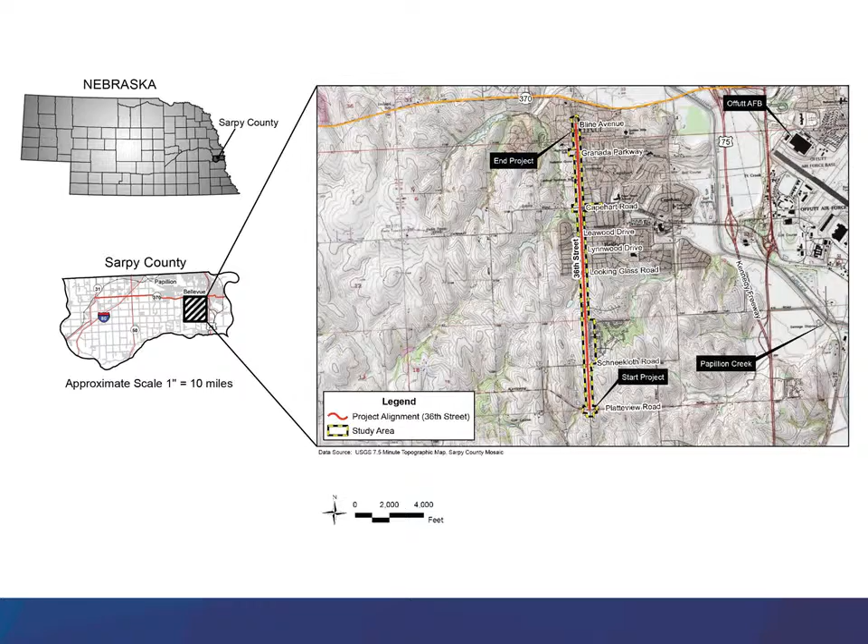The existing roadway is a 2-lane rural roadway with no surface shoulders and ditches. This project is intended to develop an improved transportation corridor between Bline Avenue and Platteview Road in Bellevue. The improved corridor is intended for the following purposes. 1. Improve local traffic operations along 36th Street and accommodate future traffic volumes and travel demands between Bline Avenue and Platteview Road. 2. Facilitate the safe and efficient flow of existing traffic.

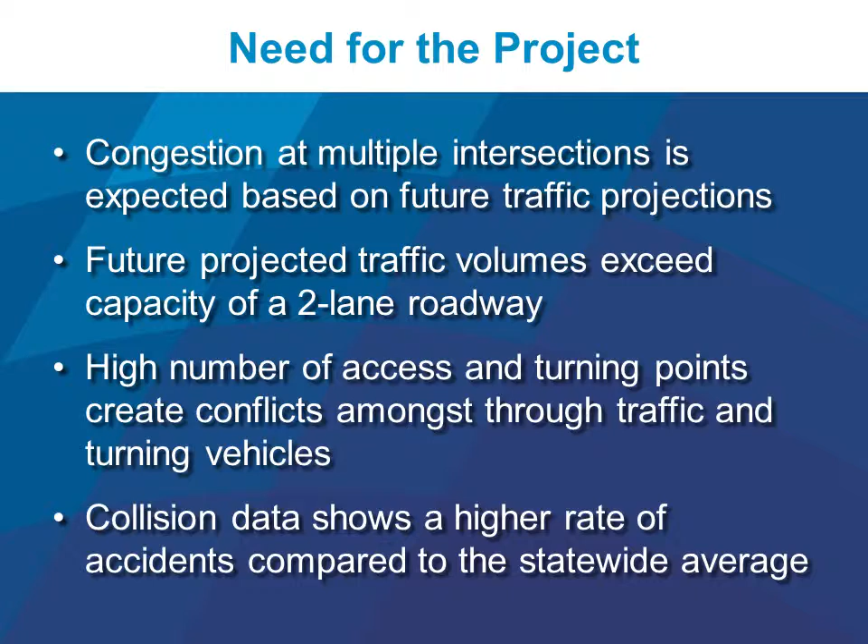The need for the project is to reduce the current and future problems with congestion and travel delays along the 36th Street corridor between Bline Avenue and Platteview Road while increasing mobility, improving system levels of service, and enhancing safety. The forecasted traffic volume for 36th Street for the year 2040 is 26,000 vehicles per day north of Capehart Road and 12,000 vehicles per day south of Capehart Road.

In addition to a no-build alternative, 7 alternatives were studied along the project corridor. These include spot improvements and various lane configuration alternatives. Alternatives 2, 3, 4, and 7 were not carried forward as they did not meet the purpose and need. Alternatives 6 and 8 were not selected as they had greater impacts and less public support than Alternative 5. The no-build alternative was carried through the EA analysis as required by NEPA. The no-build alternative provides the baseline for evaluating potential impacts.

The 4-lane divided 3-lane combination alternative was determined to be the preferred alternative. This alternative meets the project purpose and need, resulted in fewer environmental and right-of-way impacts, and had the greatest level of public support during the previous public meetings.

To comply with the requirements of the National Environmental Policy Act, an environmental assessment has been developed for this project. The purpose of the environmental assessment is to evaluate potential impacts to the environment that may result from the proposed project alternatives. The environmental assessment could result in one of 3 outcomes: a finding of no significant impact, a determination that more information is needed, or that significant impacts would occur and an environmental impact statement is required.

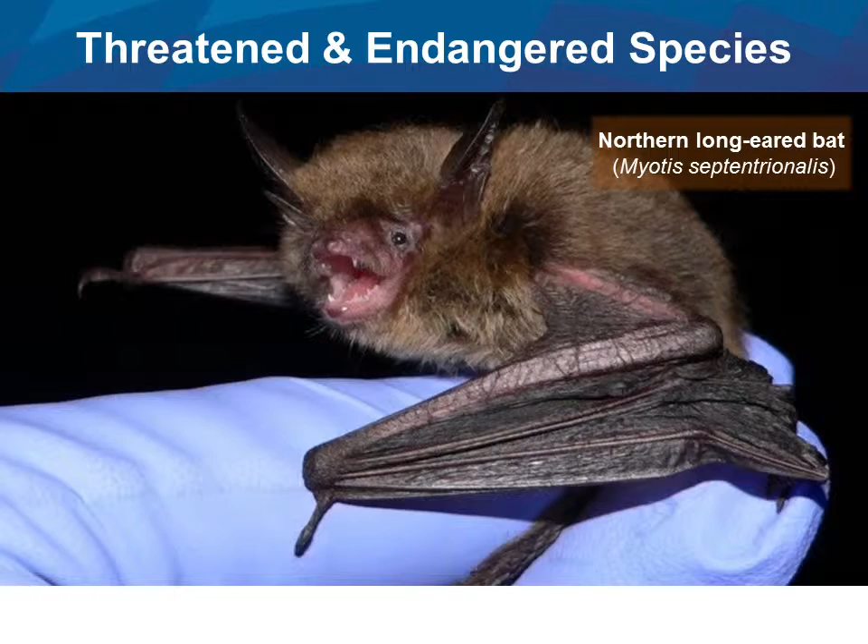It has been determined that one property within the study area is eligible for inclusion on the National Register of Historic Places. This property would be avoided, and the project would result in a no adverse effect determination. The State Historic Preservation Office concurred with this determination. Publicly owned parks, as well as wildlife refuges and properties eligible for the National Register of Historic Places, are protected under Section 4(f) of the Transportation Act of 1966.

No impacts to the features, attributes, or activities of Leawood Oaks Park that make it eligible for protection under Section 4(f) would occur. The park impacts would be minimized by constructing a retaining wall in the area. As a result, FHWA has determined this project results in a de minimis impact. The City of Bellevue Parks Department has concurred with this determination.

The project was evaluated to determine if it would result in increased noise impacts to residents along the corridor. The noise study determined 9 receptor locations would be impacted by the project. Noise walls were evaluated to mitigate these impacts, and all but one were determined to not be feasible and/or reasonable. A noise wall is feasible if it can be built to meet noise reduction goals, fit in the topography, and does not pose a safety concern. A wall is reasonable if it's cost-effective and is accepted by the adjacent landowners.

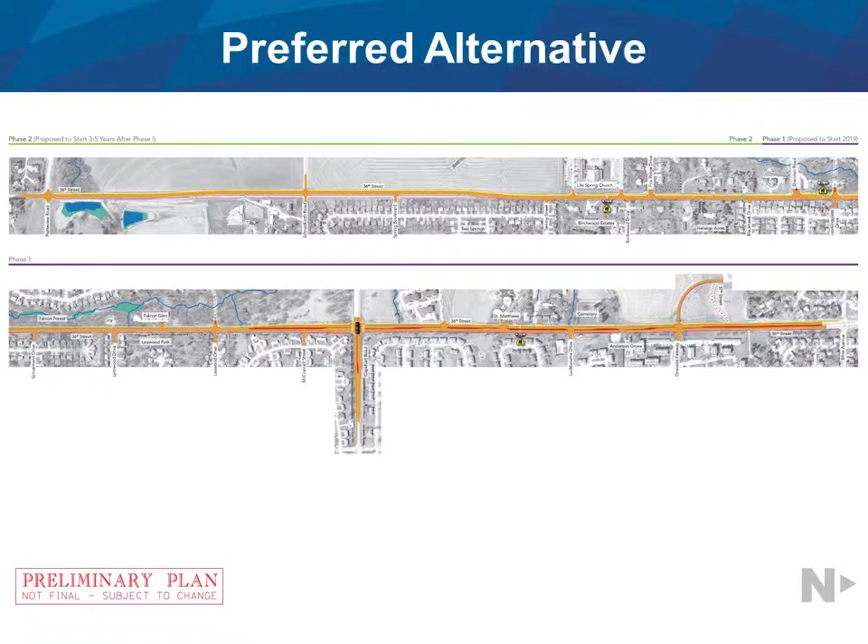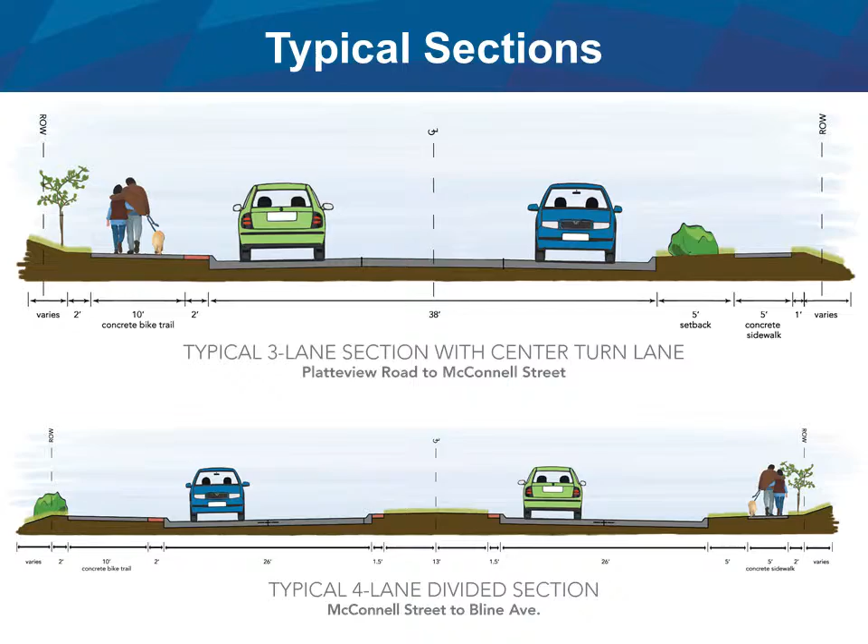The proposed improvements consist of reconstructing the existing 2-lane roadway to a 4-lane divided section from Bline Avenue to approximately McConnell Street. It then transitions to a 3-lane roadway with center turn lane south to Platteview Road. Curb and gutter, sidewalks, and a bike trail will be included. Starting at Bline Avenue, the 4-lane section would be carried south. Direct access to driveways would be reconstructed as needed throughout the corridor.

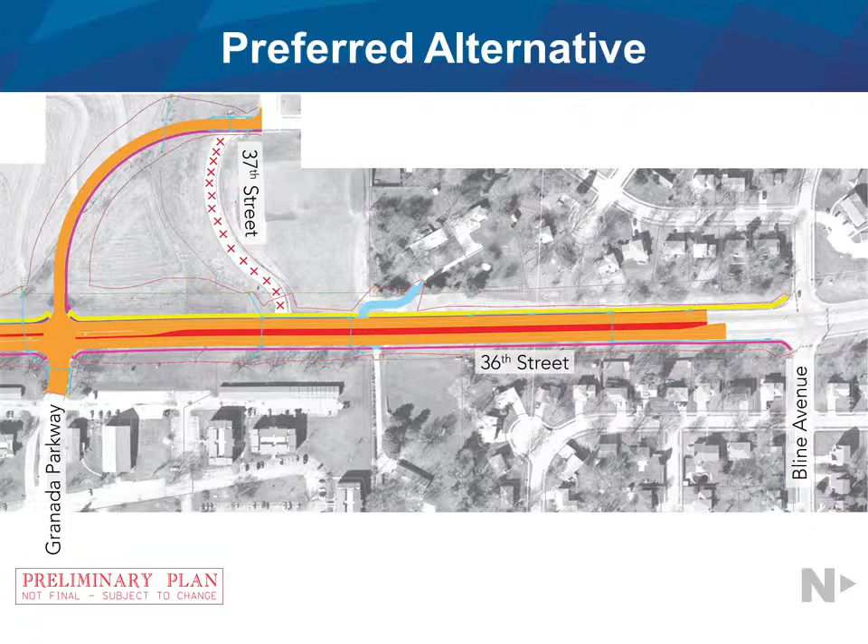37th Street would be realigned across from Granada Parkway. This would be done to reduce conflict points and improve safety. Grades on the new 37th Street would be improved as well. This improvement was not shown in the draft environmental assessment, but will be shown in the final document. Continuing south, access to the Anderson Grove Presbyterian Church would be maintained at all times. Impacts to the church parking would occur as a result of the widening.

Approximately 8 stalls are in the existing right-of-way and will be removed. Handicapped parking stalls would be maintained, and ADA access to the church would be maintained at all times. Potential solutions include reconfiguring the existing stalls on the south side of the building and maintaining ADA accessible entrances. The city would work with the church during the final design and right-of-way process to address these issues.

The median width would be reduced through this area, and retaining walls proposed to minimize impacts to the adjacent properties. The existing pedestrian crossing and access sidewalk would be reconstructed to meet current standards, and the driveway at St. Matthew's Church would be reconstructed to improve access and operations during school pickup and drop-off.

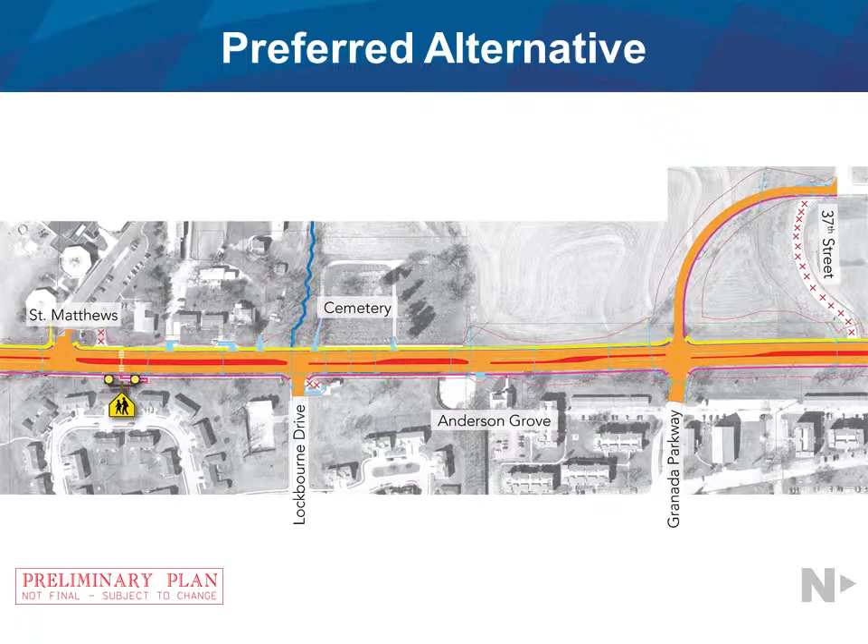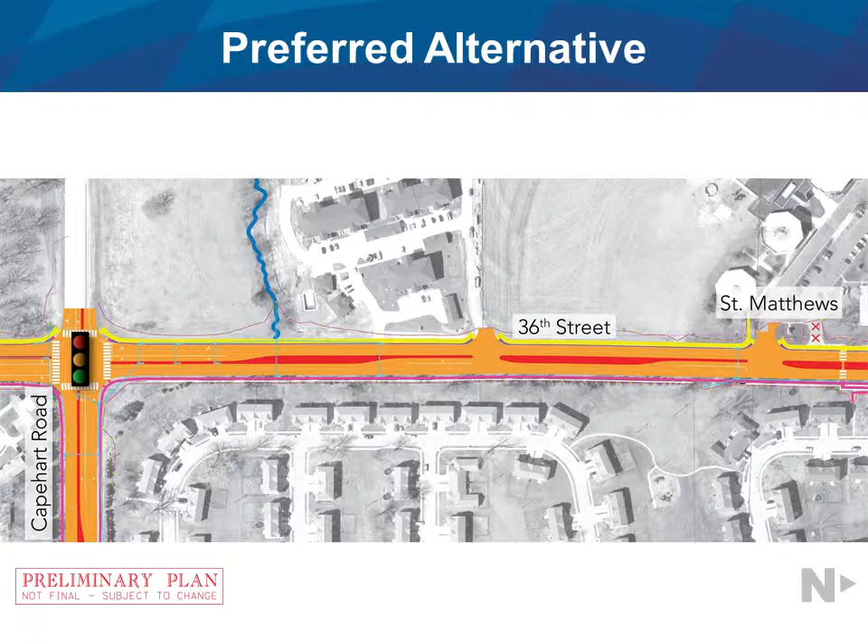Moving south, we approach Capehart Road, where the traffic signal would be reconstructed along with the intersection improvements including dedicated turn lanes. Retaining walls would again be necessary to limit impacts to the Department of Defense properties to the east. Along Capehart Road, the west side would have minimal improvements, while the east side would widen out to the 4-lane divided section to improve the intersection operations. This would require improvements extending to 33rd Street to taper back into the existing roadway. Consultation with the DoD has occurred regarding impacts to their property.

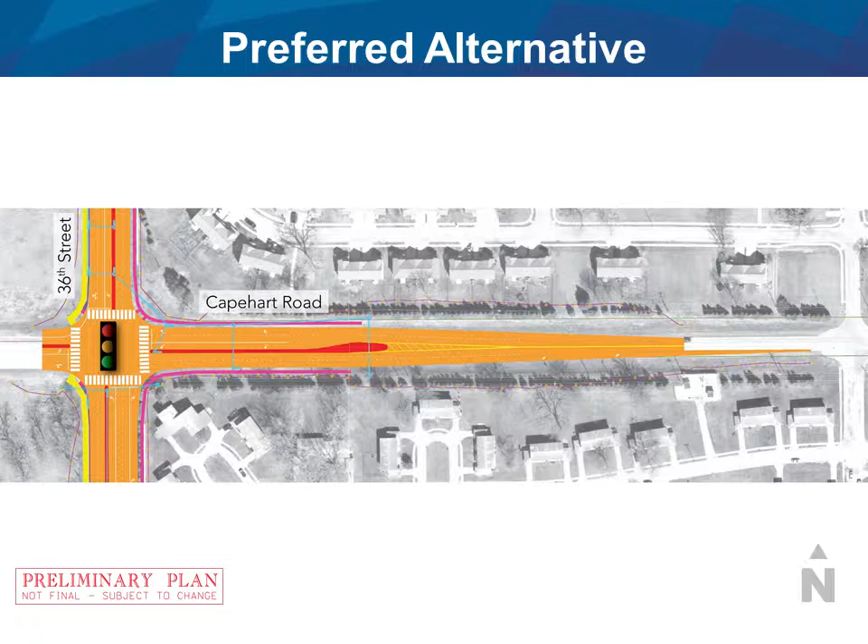The trees within the limits of construction along the corridor will be removed as part of the road construction. Jumping back to the 36th Street corridor, a noise wall may be constructed south of Capehart along the DoD property, pending a vote by the impacted owners.

Between McConnell Street and Leawood Drive, 36th Street would transition to a 3-lane section with a center turn lane. The roadway would be offset to the east to aid in construction and facilitate widening in the future. Access to utility facilities along the corridor, such as the CenturyLink building, would be maintained at all times. On the east side is Leawood Park. Retaining walls would be constructed to limit impacts to the park.

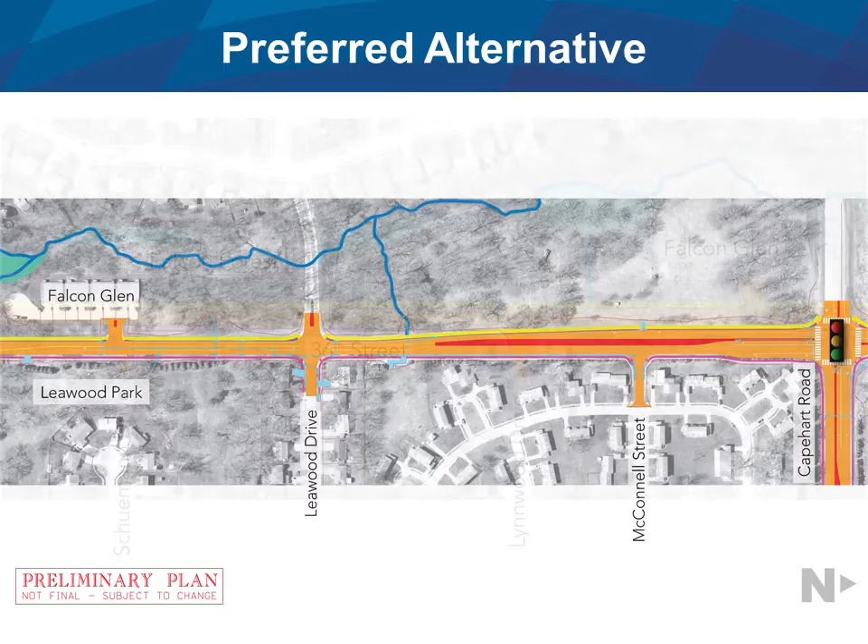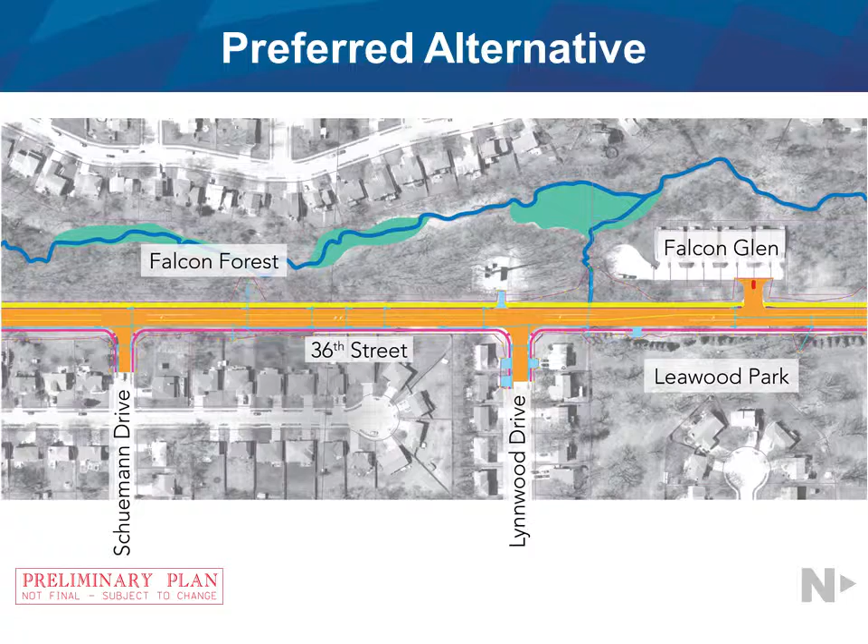Up to 200 feet of side streets would be reconstructed as needed to tie into the new grades on 36th Street. Private fences impacted by construction would be rebuilt during the construction project. Impacts to the tributary along the west side would be limited to the areas of storm sewer outfall construction. South of Lookingglass Drive is the Heartland Hills SID Park. No impacts are anticipated at this park.

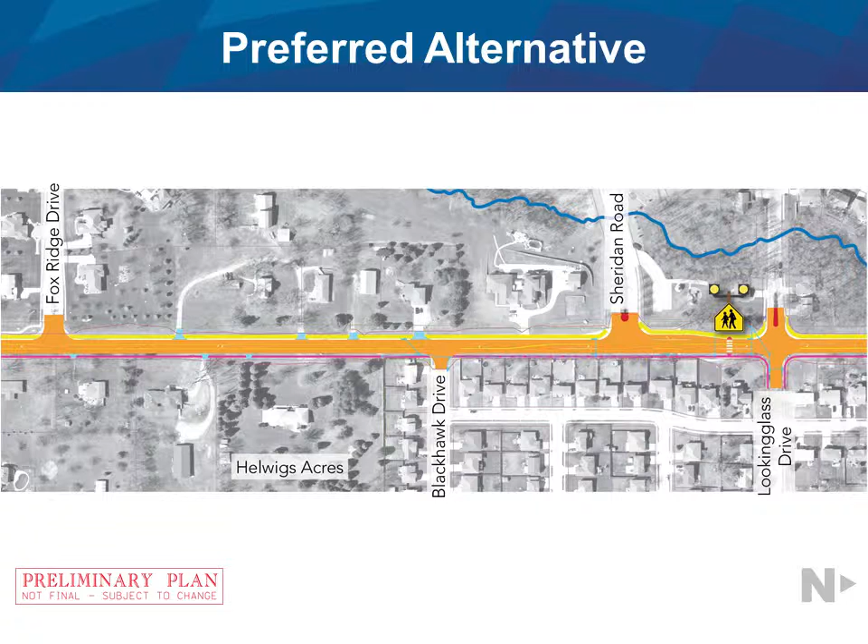The existing pedestrian crossing and right turn lane would be reconstructed to meet current standards. Impacts would be avoided to the historic farmstead. Continuing south, the existing pedestrian crossing would be reconstructed to meet current standards. South of Tammy Street, the alignment of 36th Street would shift to the west. This would reduce the impacts to the properties on the east side, as the elevation of the roadway must be raised to avoid impacting the 60-inch water main that lies underneath the roadway.

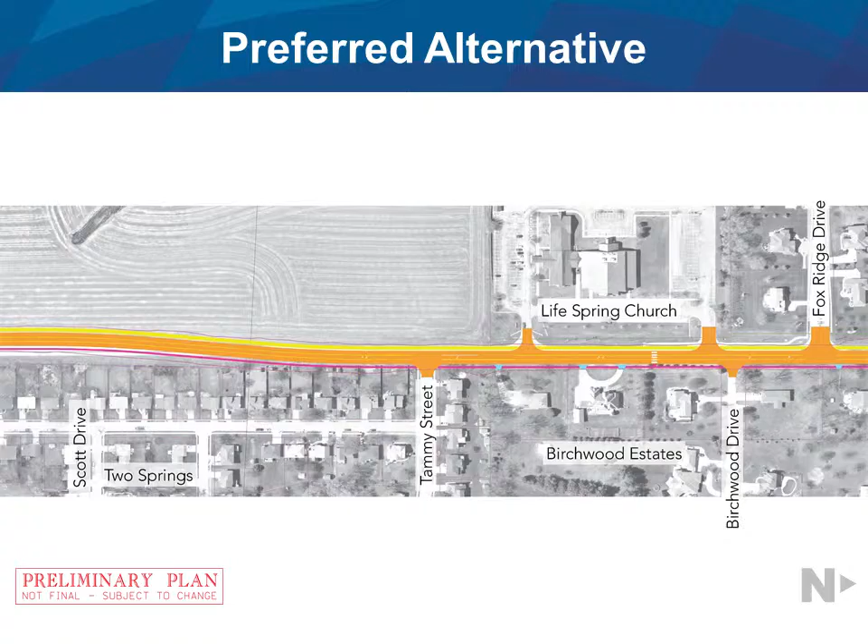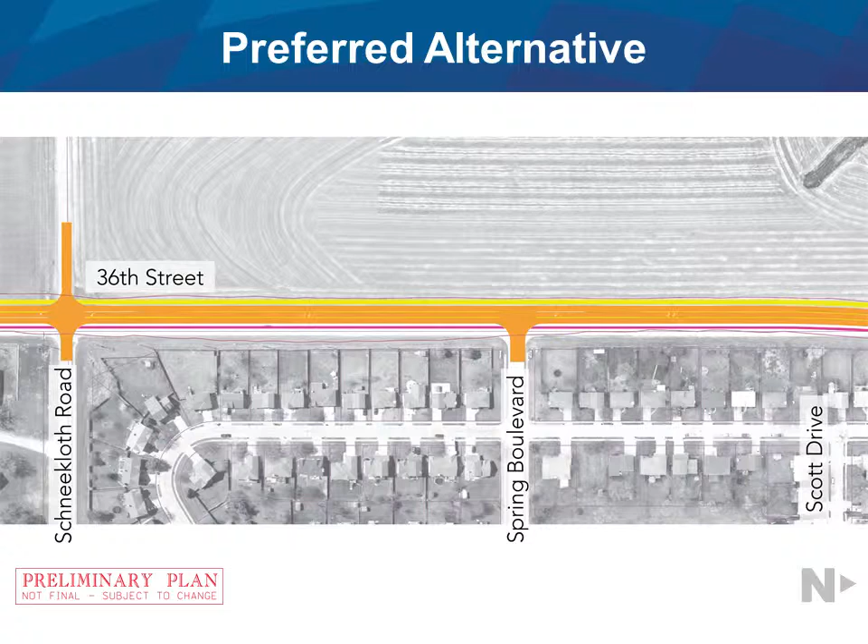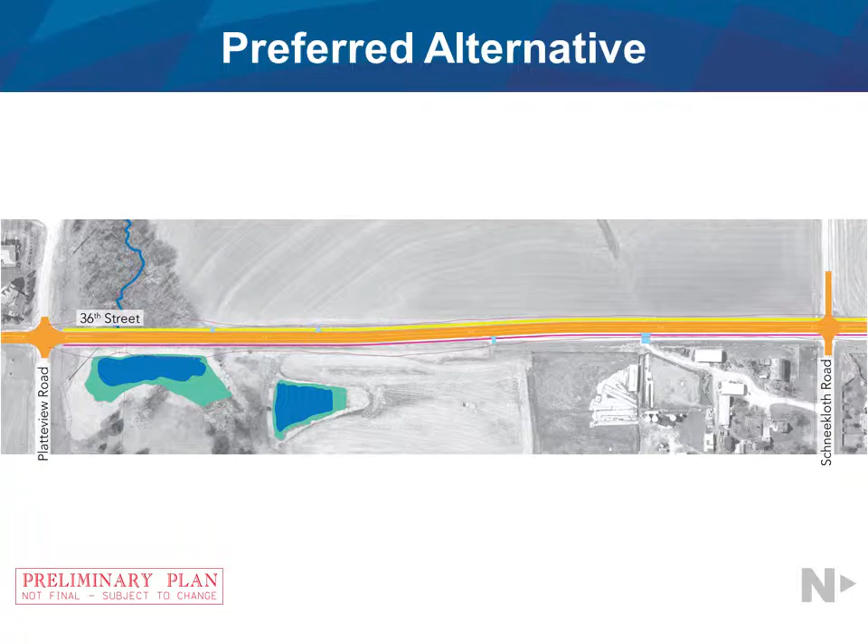36th Street would stay on this shifted alignment through Schneekloth Road. The open farmland on the west would allow for the shift to again minimize impacts to the properties on the east. Approximately halfway between Schneekloth Road and Platteview Road, the alignment would shift back to the existing section line and tie in at Platteview Road. Impacts to the adjacent wetlands and channel have been minimized. No improvements to Platteview Road are proposed as part of this project.

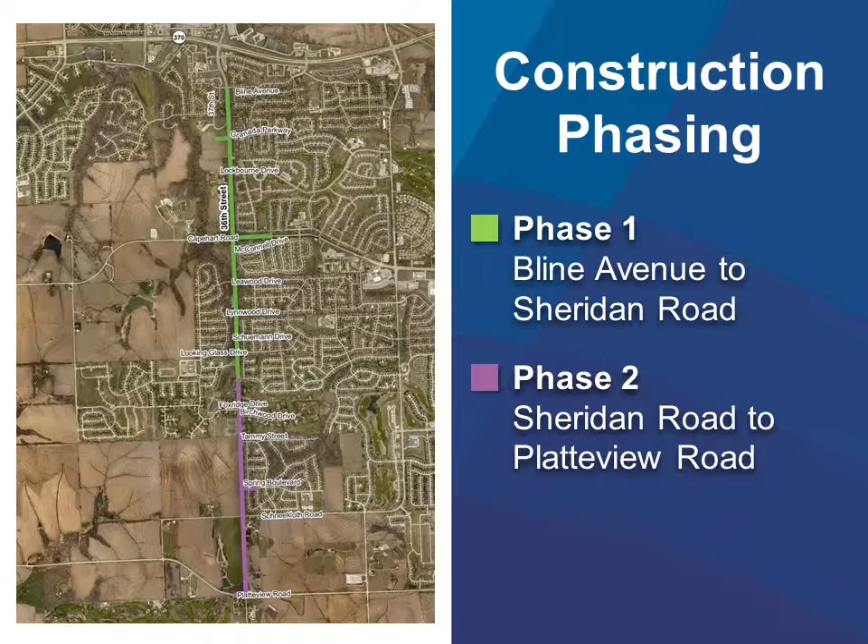Construction of 36th Street is broken into 2 projects. Phase 1, Bline to Sheridan, is proposed to begin in the spring of 2019, and Phase 2, Sheridan to Platteview, would start approximately 3 to 5 years after Phase 1 is complete, when funding is available. In general, the Phase 1 project would be constructed over 2 construction seasons, currently proposed to work from south to north, keeping traffic open during construction.

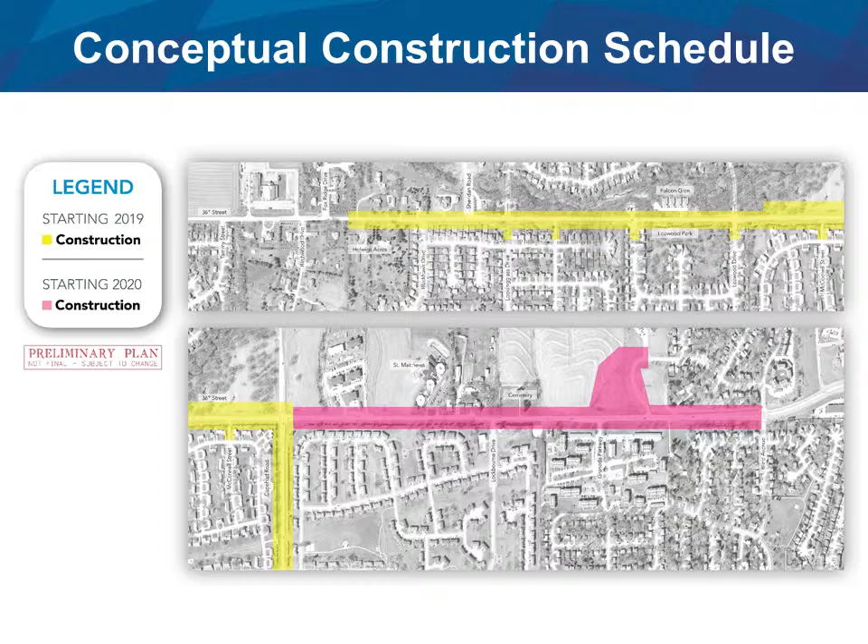This would be accomplished by using temporary pavement and closure of alternating intersections to allow neighborhood traffic to access 36th Street. Through traffic on 36th Street would be maintained using temporary road widening, and access to neighborhoods and properties would be maintained at all times during construction activities. Some residences on 36th Street could lose direct access during driveway reconstruction. This restriction would be short-term, up to 2 weeks. Alternative access or parking accommodations would be made in the same neighborhood up to 2 blocks away.

Coordination with properties losing access would occur prior to the work commencing, and special access needs would be addressed on a case-by-case basis. Access for emergency response would be coordinated through the project. Trash and recycling service would continue during construction. Residents would place their containers in their driveways on regular collection day. The contractor would be responsible for transporting the containers to a designated collection zone and returning them to the respective property.

The costs of construction for the 2 program projects are as follows. Phase 1 is approximately $10.9 million, and Phase 2 is approximately $9.9 million. Funding sources would include federal and local funding through the City of Bellevue. The City of Bellevue would participate with a 20% cost share.

All interested persons are invited to present remarks and questions. Your comments are encouraged. Public statements may be made between 6:30 and 7:00 p.m. during the public forum. If you wish to make a verbal statement privately, ask for a representative at the sign-in table. All verbal comments will be transcribed and will become part of the project record, environmental assessment, and the official hearing transcript report. If you wish to express your views in writing, you may take a comment sheet. Emails and fax are also welcome. All substantive comments will be addressed in the final EA, which will be available on the City of Bellevue website.

Following the comment period, the City and Design Consultant will review and address comments received and prepare the final environmental assessment. Upon FHWA review, a decision document will be prepared. If a finding of no significant impact is issued, the project would proceed with final design, right-of-way acquisition, and start construction, which is anticipated for spring of 2019.

Thank you for attending the City of Bellevue Public Hearing Open House for the 36th Street Improvements Project. City representatives are available to meet with you and discuss any questions or concerns you may have on the project. The draft environmental assessment and preliminary plans are available for you to view.